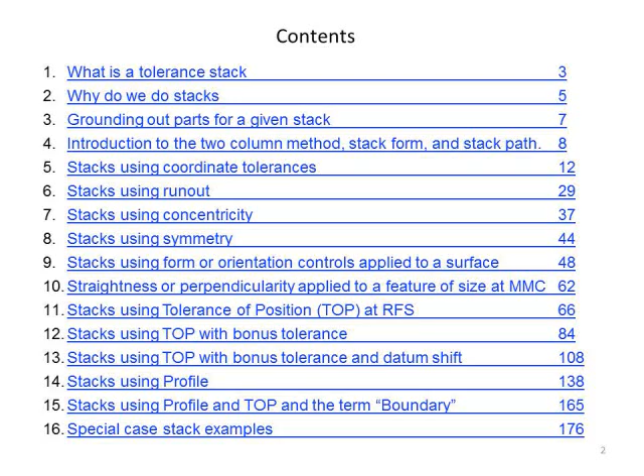There are several different methods of addressing clearances in an assembly. This book teaches the method of grounding out the parts.

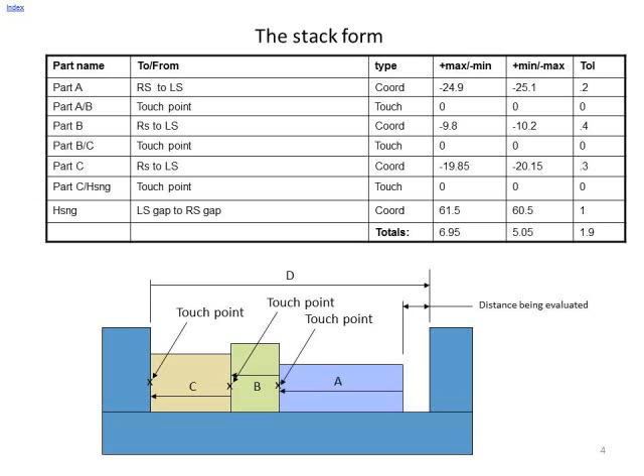The book also teaches how to use the stack form. The stack form disciplines the user to document the stack in a consistent, clear manner that helps assure an accurate result.

One of the most difficult parts of learning to create stacks is learning to establish the stack path. Also, in my experience in mentoring stacks, I find that probably about 80% of the time, when there's a problem with the stack, it relates to the stack path. Therefore, this book puts particular emphasis on teaching how to establish the stack path.

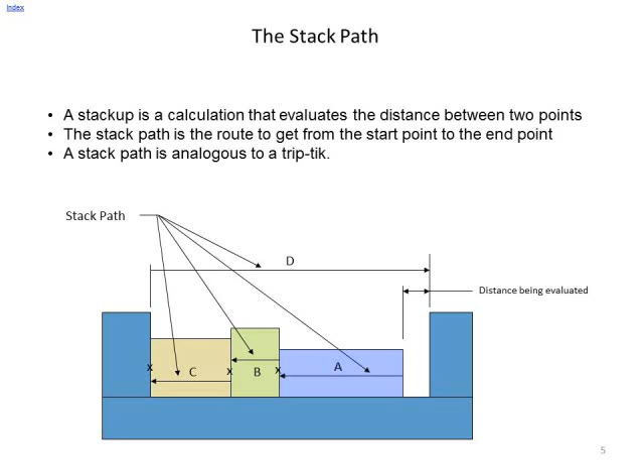Stack paths are also shown and emphasized in examples and exercises throughout the book. Examples demonstrate that often in an assembly, the same gap will have a completely different stack path for a max value versus a min value.

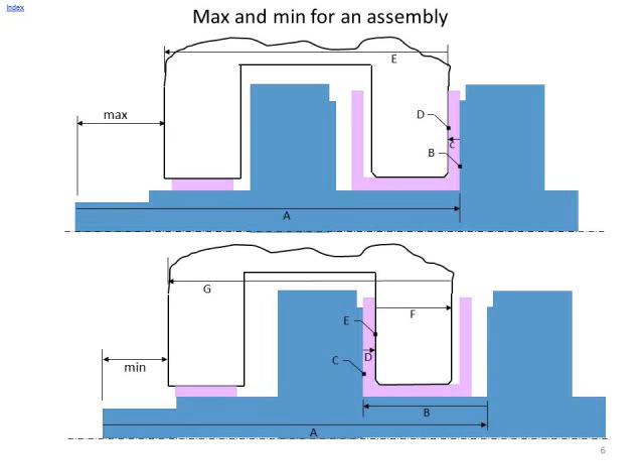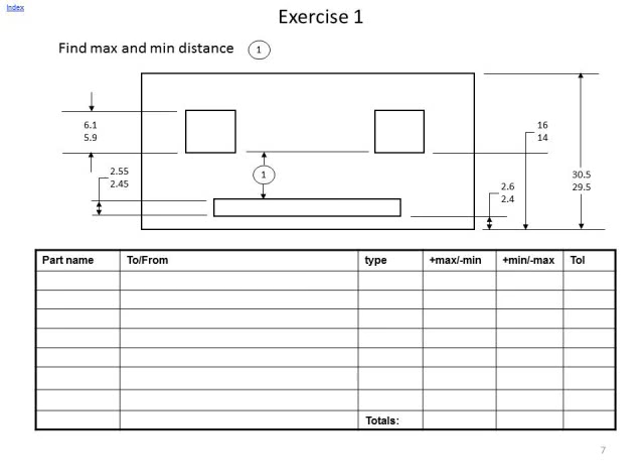Each exercise includes a page with the problem statement and a form for creating the stack. The user could print out this page to do the exercise on paper. The user could also choose to do the exercises on a spreadsheet. Each exercise also includes a complete, detailed solution.

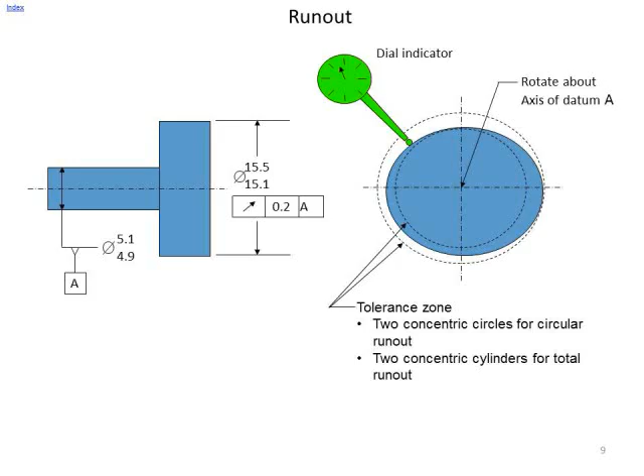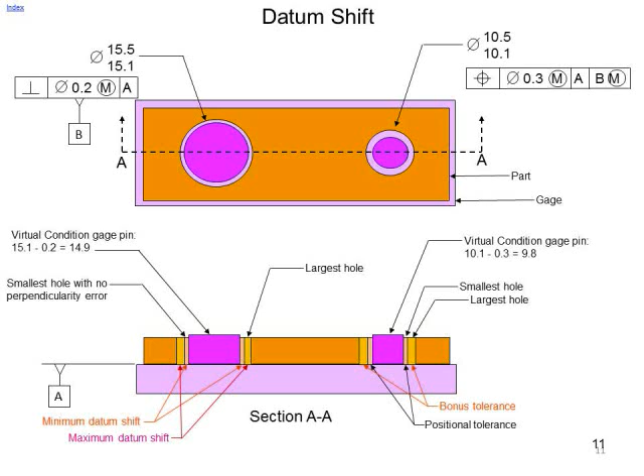When each geometric characteristic is introduced, the fundamental concept is first reviewed. Then the book teaches how to handle it in a tolerance stack. The book contains what I believe to be the best explanation in the world of what bonus tolerance is. The book also contains what I believe to be the best explanation in the world of what datum shift is.

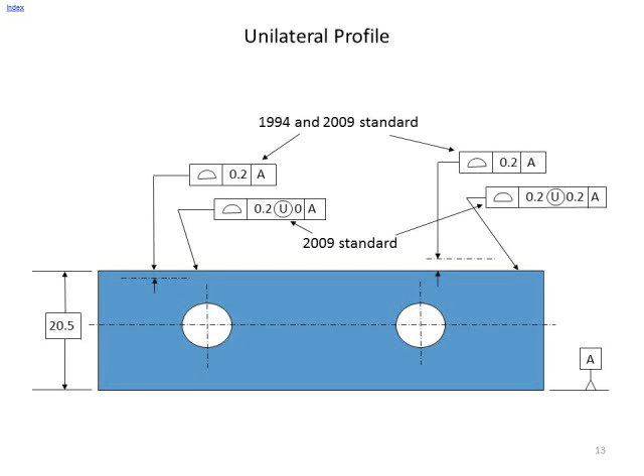Difficult to remember formulas are listed on the same page as the exercises where they are needed. The book acknowledges differences between the 1994 ASME standard and the 2009 ASME standard.

The book addresses unusual shapes that are defined with a profile callout and a tolerance of position callout and the word boundary. One example covers using such a shape as a considered feature, and another example covers using such a shape as a datum feature.

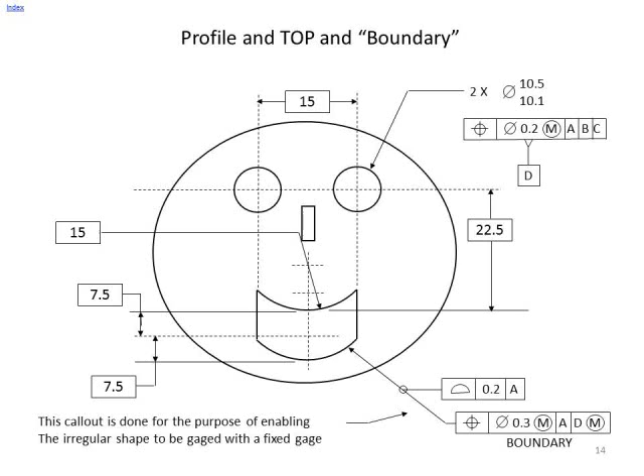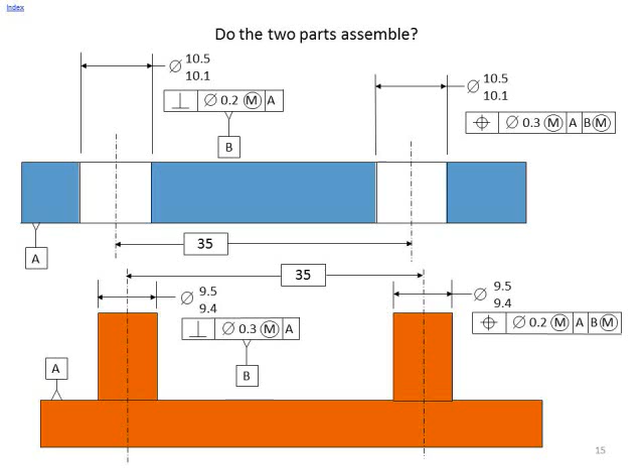The simplest situations seem to raise the most complex questions. Special case examples focus on two pins fitting into two holes. These are some of the most common stacks and also the least understood.

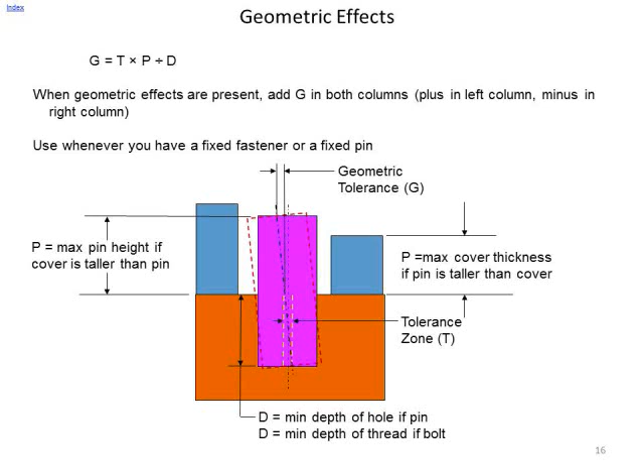If the pins that must fit through the holes are pressed or threaded into holes in a base that do not have a projected tolerance zone specified, there is a geometric effect that has a huge effect on the stack. There is an example including geometric effects and also a straightness callout on the bolt.

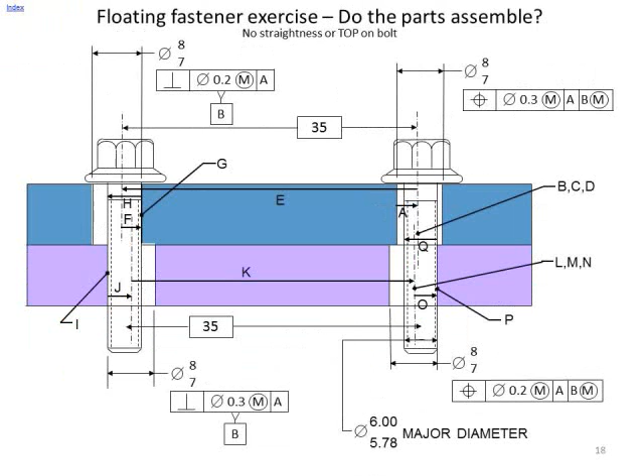There is also a floating fastener example. The grand finale is a stack with the bolt threaded into the base, a pin pressed into the cover, geometric effects with both, and a tolerance of position on the bolt shank relative to the threads.

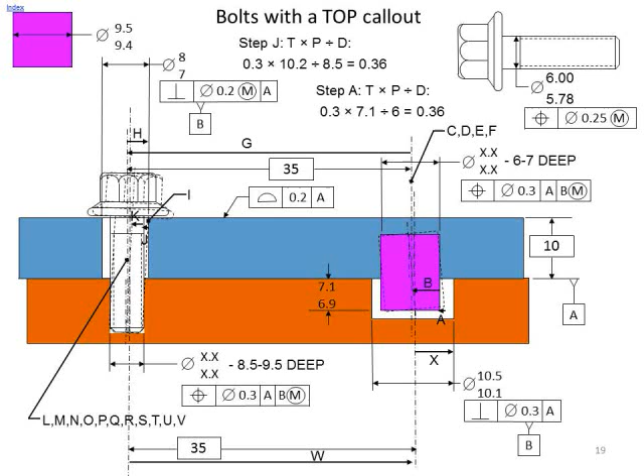This book covers the simplest of concepts for the user who is new to tolerance stacks and also handles the most complex situations for the experienced user.

Dimensional Consulting also offers a Stacks Wizard, which is a computer program that prompts the user for appropriate information and then creates the stack.